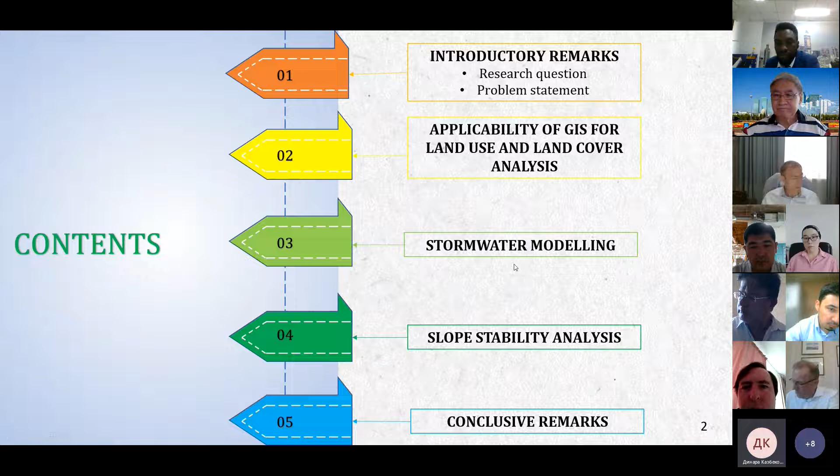So I hope everyone can see the presentation. Yes, yes. Okay, good morning, everyone. My name is Timothy Mkilima, and today I'm excited to present to you key results from the study titled Aspects of Embankment Dam Stability, considering the effect of land use change and climatic conditions in catchments. To start with, here we have the main list of contents from the introductory remarks to the conclusive remarks. And for the introductory remarks, I will start with the research question.

But before I proceed, I would like to highlight that in general, this study was designed after observing what is currently happening in the Msimbazi catchment in Dar es Salaam, Tanzania. Dar es Salaam is actually the largest city in the country. Because this catchment crosses the center of the city, it has been subjected to significant change in terms of land use cover. As a result, the catchment that was flowing throughout the year has now changed into a highly intermittent one. During the rain season, it comes with huge volume, with very high demolishing power, and after that the catchment remains almost dry the rest of the year.

Also note that in December 2011, the catchment received the so-called 100-year event that left almost 50,000 people in the city homeless and killed hundreds of people. Every rainy season, the catchment also kills a number of people and leaves thousands homeless. Because of that, the World Bank has invested a lot of money, as we speak, in search of a solution. However, in my opinion, unless these two factors are well understood, we are still very far from reaching the appropriate solution.

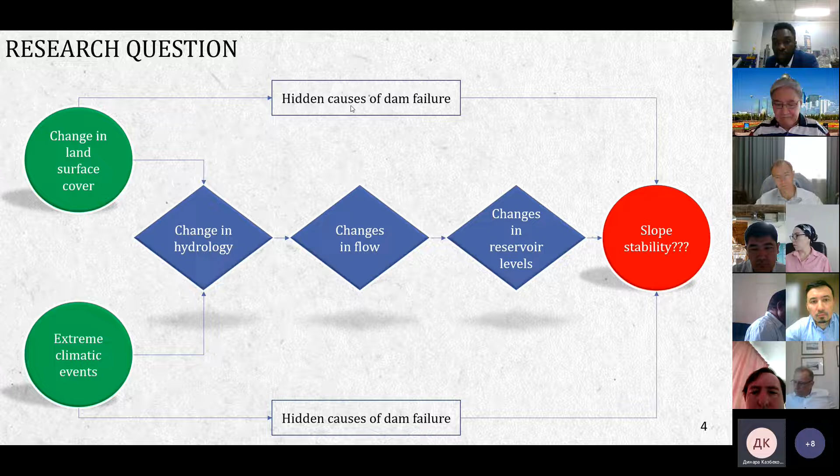Interestingly, the National Geographic from the United States has recently included these two factors among the hidden causes of dam failures that are likely to compromise the safety of dams in the future. So this is the general perspective of the research question.

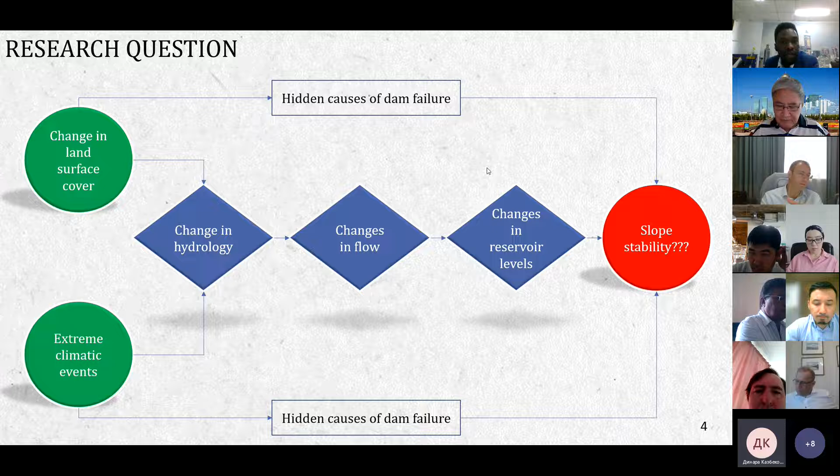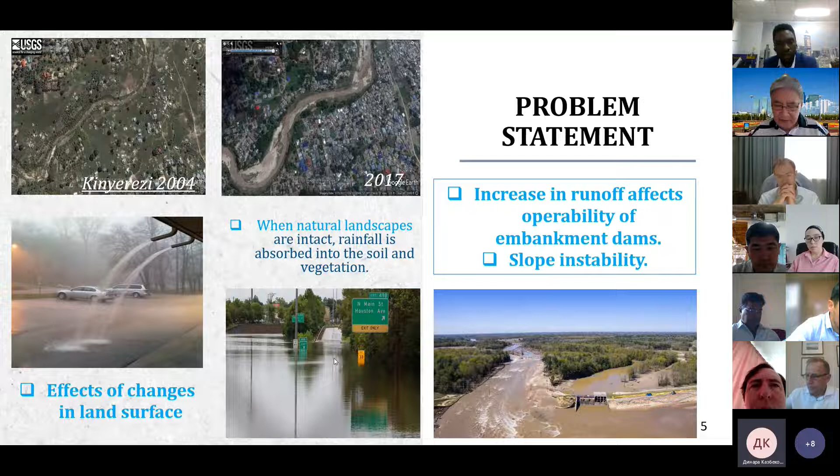When you have something like this, you have more impervious surface cover. And when you have more impervious surface cover, you limit the infiltration to the ground. When you limit infiltration to the ground, you have surface runoff like this one, and eventually you have a dam failure somewhere.

To proceed with the problem statement, here is a nice illustration of pervious and impervious surface cover. When you have more natural surface, you have less surface runoff and more subsurface flow.

And when you have more subsurface flow, it takes a very long time for this water to reach a nearby dam, giving more time for the dam to accommodate the flow.

But when you change the surface into an impervious one, you have more surface runoff that goes faster to a nearby dam, and this does not give the dam time to accommodate the flow.

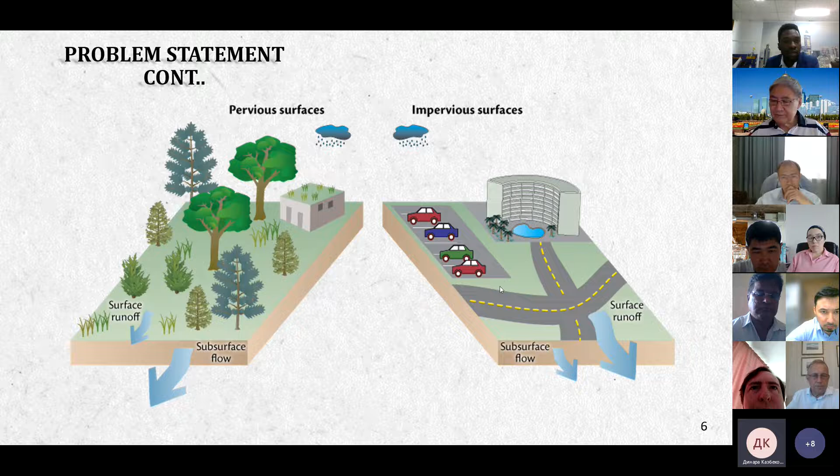Now, because of time, let's also move to the research design. In general, the research was designed based on four main tasks. Number one is GIS applicability.

From this part, it gives us a go-ahead to proceed with the land use land cover analysis. The results from the land use land cover analysis are then used in the stormwater modeling.

And the results from the stormwater modeling give us the decision on whether we include both high water level or reduced water level for slope stability analysis.

The methods used in general include GIS, the SCS curve number method, and finite elements. From the datasets, I use digital elevation models, Landsat satellite images, and soil data.

Here is the hydrologic soil group, precipitation, observed flow data, and soil data as a geotechnical parameter. A total of five case studies were used, two in Tanzania and three in Kazakhstan, with three virtual models.

So let's move to the potential applicability of GIS and land use land cover analysis. From the potential applicability of GIS, here I use the Msimbazi catchment, and the reason is that in the analysis I used the so-called supervised method in ArcGIS.

In this approach, it's very important that you develop a base model from a well-known catchment.

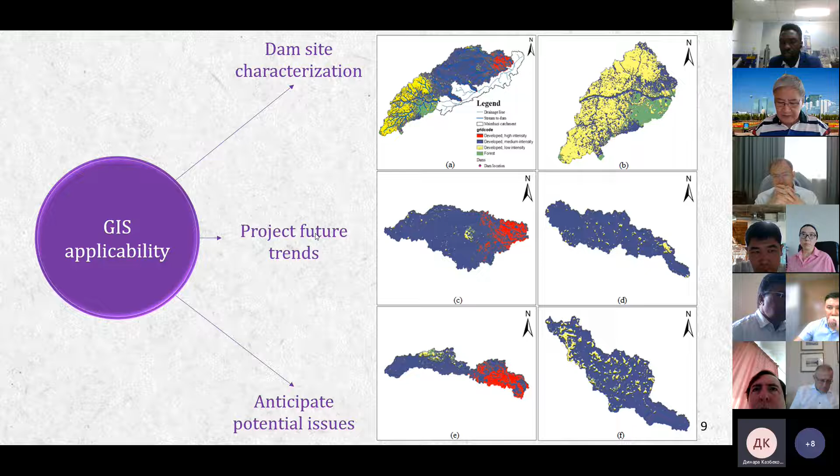With this, you can be able to project future trends and also anticipate potential issues that are likely to be linked to changes in land surface cover.

So to proceed with the land use change analysis from the base model, I was able to proceed with the land use change analysis for the Ndembera catchment. Here we can see from this nice figure how the situation was in 1990 from the 1990 datasets.

The catchment was covered more by wetlands, but by 2011, the catchment was moving more into medium intensity impervious cover.

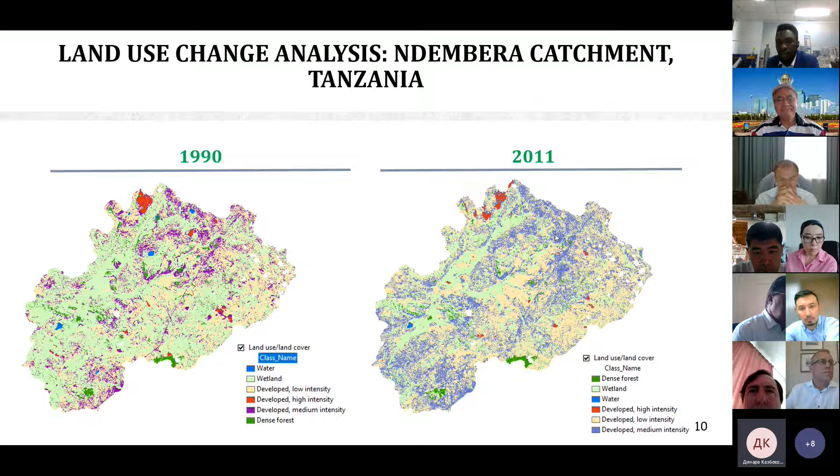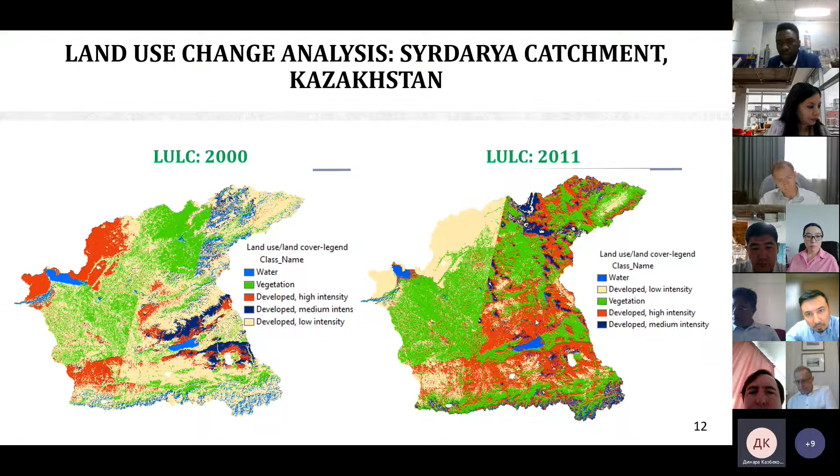Going further to the Syrdarya catchment in Kazakhstan, we can understand that by 2000, the catchment was more of a mix between low intensity and high intensity development. But by 2011, the catchment is moving more into high intensity development. From the graphical view, we can visualize better that by 2000, the catchment was covered with more low intensity, but right now it's moving more into medium and high intensity development.

The results from the land use and cover analysis were then used in the stormwater modeling, especially the curve number. Based on the results I obtained from the land use and cover analysis, I was able to model the stormwater in the catchments.

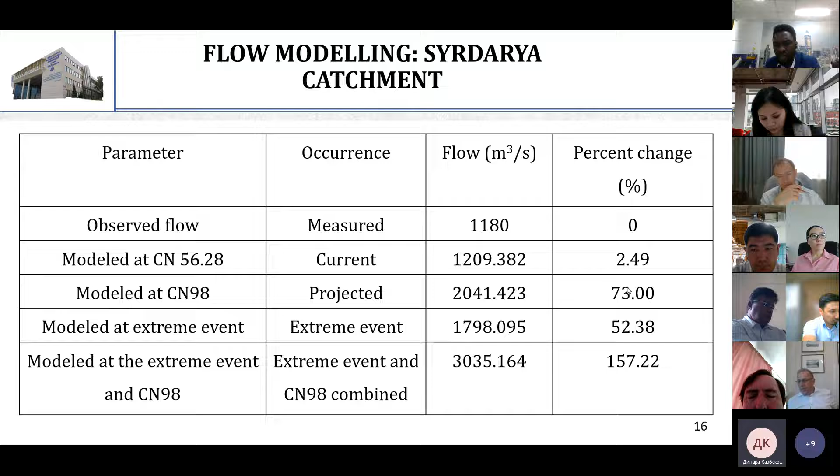Something important to note here is that for the Syrdarya catchment, the curve number had more impact than the extreme event, in comparison to the Ndembera catchment, where the extreme event had more influence on the flow than the curve number. This is realistic because Tanzania is located within the tropical region, and of course precipitation is significant in comparison to Kazakhstan as a region.

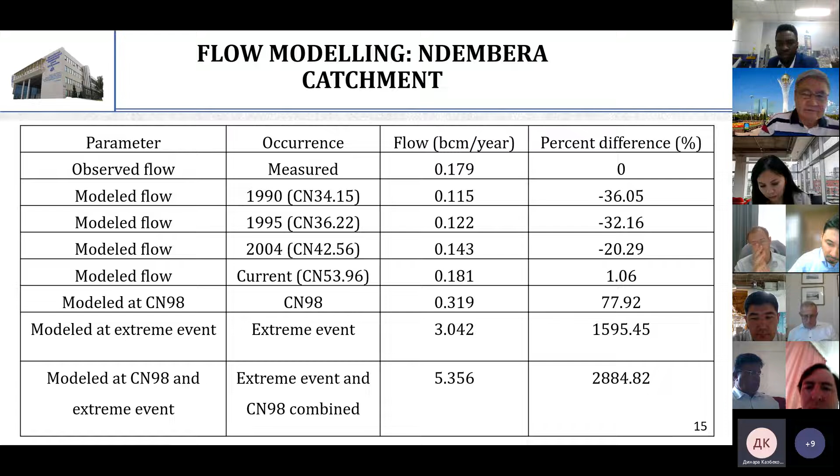So now, after looking at the flow, let's move to the slope stability analysis. In general, the design of slope stability analysis is based on three main factors: when the flow changes in the catchment, we have a change in water level in the reservoir that affects both steady state and transient conditions. Also, when we change the water level or flow in the catchment, we subject the embankment to rapid drawdown, either planned or unplanned. Then we end up with some sort of instability issues, but of course the stability issues are also somehow related to material characteristics that affect the pore pressure dissipation.

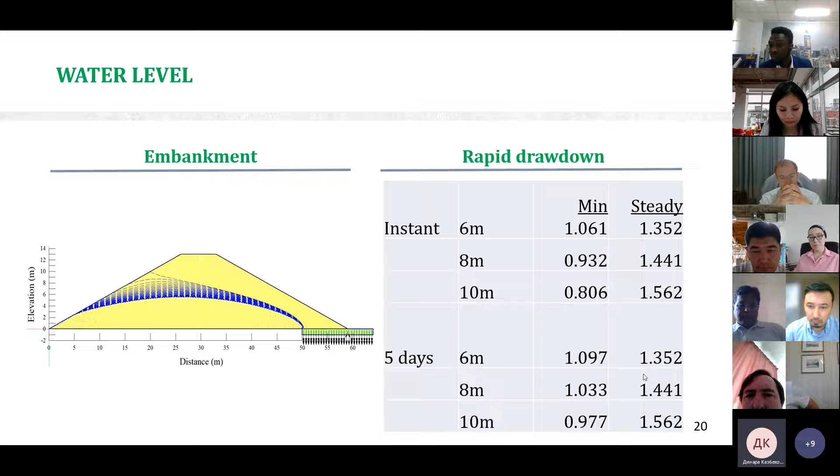Something important to note here, as I observed in the study, and I think this is where we always make mistakes as engineers: if you focus only on the steady state condition, you will find that the factor of safety is increasing with the water level. But indeed, if the same embankment is subjected to rapid drawdown, we have total failure. So it's significantly important to take into account both the rapid drawdown and steady state conditions. Similarly, when subjected to 5 days, the same situation occurs: as you increase the water level, the factor of safety values decrease, while the steady state factor of safety values increase.

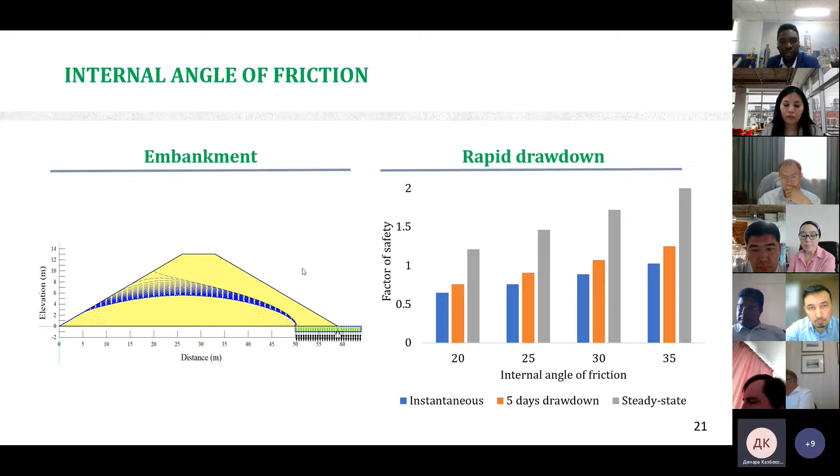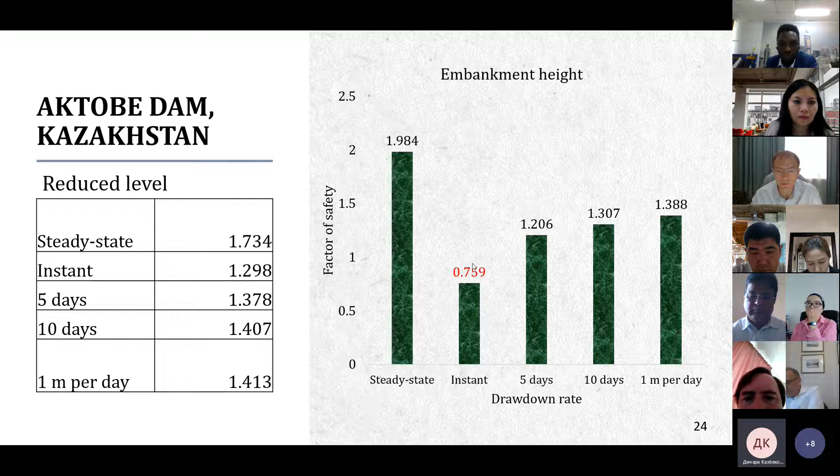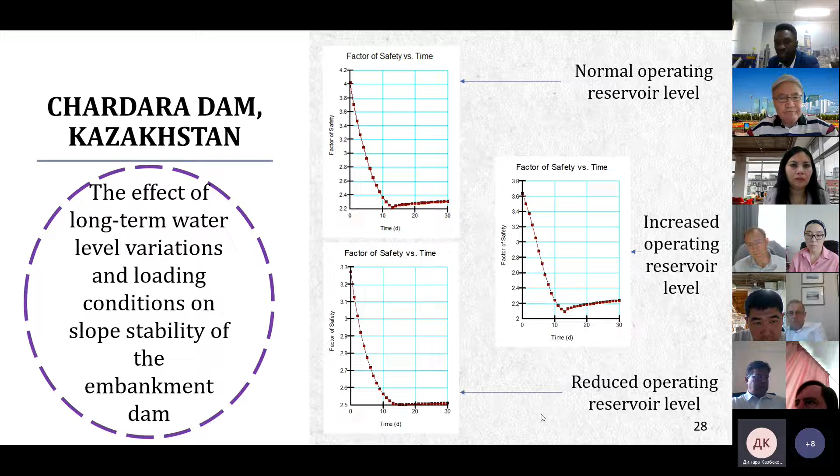This is a graphical presentation of the results from the Chardara Dam in Kazakhstan, for a 1 meter per day drawdown rate. From the normal operating reservoir level, we get a minimum value above 2.2. If you increase the water level in the reservoir, you get something below 2.2. But if you reduce the reservoir level, you get something above 2.5.

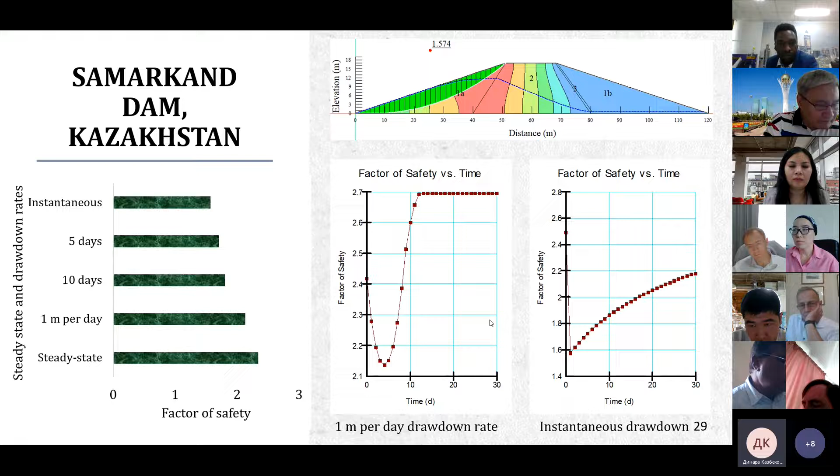So it was also significantly important in the study to justify the results based on some methodologies, especially statistical methods. And in my case, I used a very useful tool, the so-called ANOVA, analysis of variance, to justify the significance level of the differences in terms of the factor of safety values.

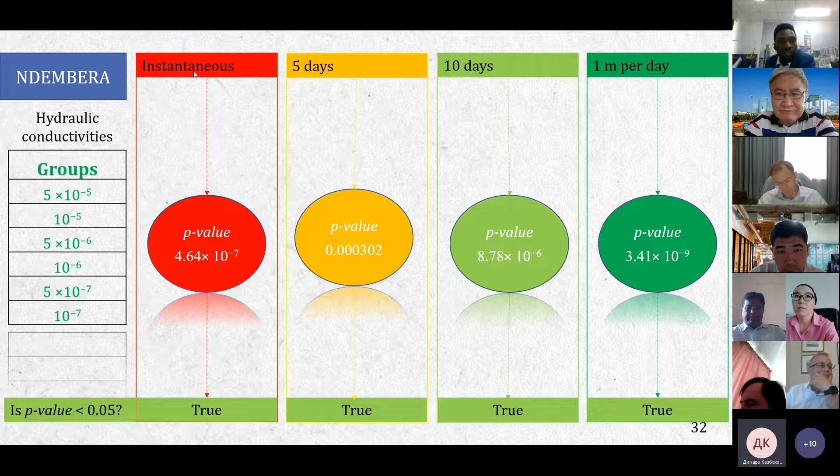And if we move to the Ndembera Dam, different hydraulic conductivities were also subjected to the ANOVA. For the combination of these hydraulic conductivities and instantaneous drawdown, the p-value is less than 0.05. This is also an indication that the differences were statistically significant, and these factors should not be ignored when it comes to the design of dams, similarly for the other drawdown rates.

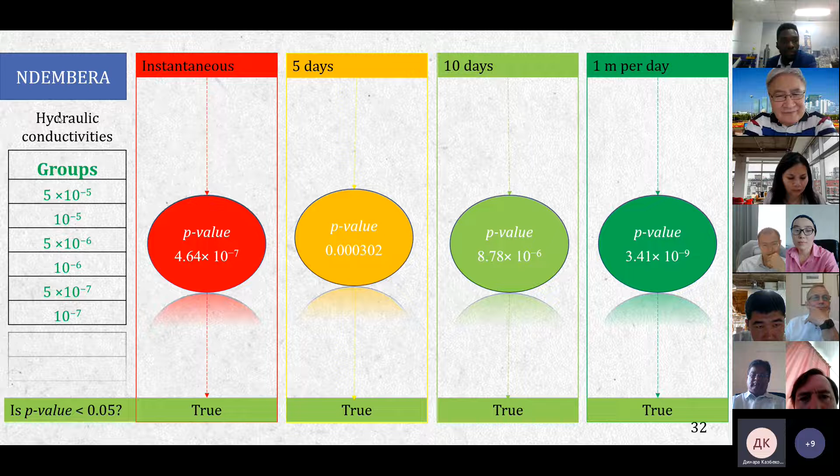Here there are two things we can note: at least when we reduce the drawdown rate, we also reduce the impact of water level in terms of slope stability. However, this should be taken with care, because the p-value is still below 1, which means there are still some differences in terms of the factor of safety values, and these should also be taken into account during the design.

And moving to the conclusive remarks, from the GIS application, using the supervised method, I was able to sufficiently delineate the dam site. And this part should also be very well incorporated during the design. And from the land surface cover analysis, as we observed from the Ndembera Dam, the medium intensity moved from 13% cover in 1990 to 54%.

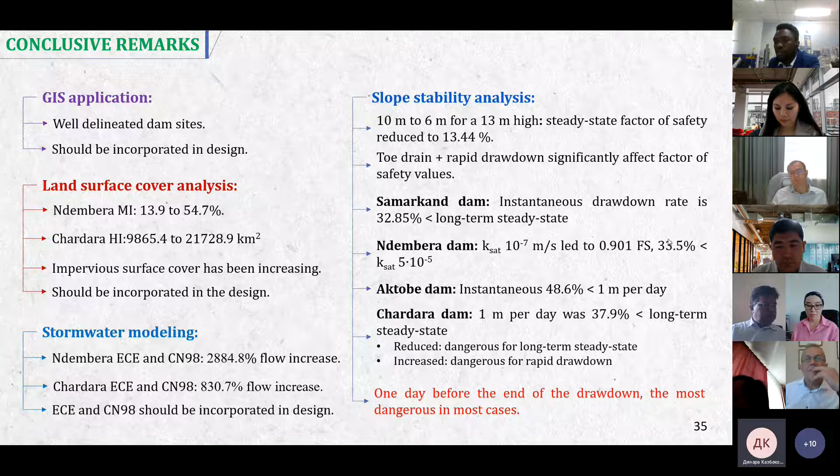Also from the Samarkand Dam, the instantaneous drawdown rate led to a factor of safety value that was 32% less than the one obtained from the long-term steady state. And from the Ndembera Dam, for the hydraulic conductivity values, 10⁻⁷ led to a factor of safety value of 0.901, which is 33.5% less than the one obtained from 5 × 10⁻⁵.

Also from the Aktobe Dam, the instantaneous drawdown rate led to something 48.6% less than the one obtained from 1 meter per day. Also from the Chardara Dam, 1 meter per day drawdown rate was 37.9% less than the one obtained from the long-term steady state.

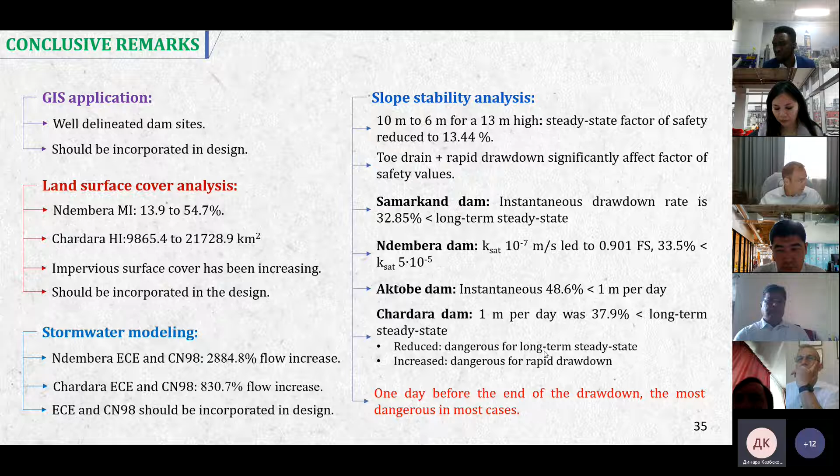Now, what I observed in this study is that when you reduce the water level in the reservoir, this becomes extremely dangerous for long-term steady state condition. But when you increase, this becomes extremely dangerous for rapid drawdown. Therefore, when you design a dam, you do something optimum, taking both into account, so that you can take both into account during the design.

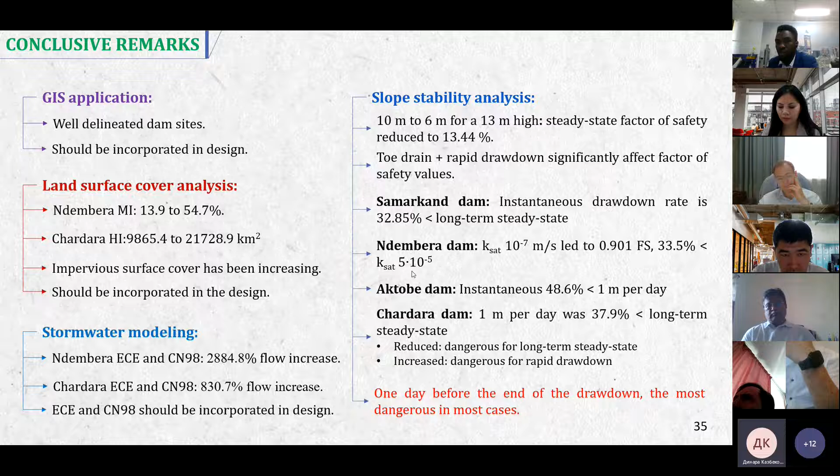And here I also had to highlight in red that from my study, I also observed that when you subject your embankment to rapid drawdown, then 1 day before you finish the drawdown becomes the most dangerous day in most of the cases. Therefore, when you drain your reservoir, you have to carefully pay attention on the last day, 1 day before you finish your planned drawdown. Of course, if you are able to plan, because sometimes the rapid drawdown can be unplanned and natural.

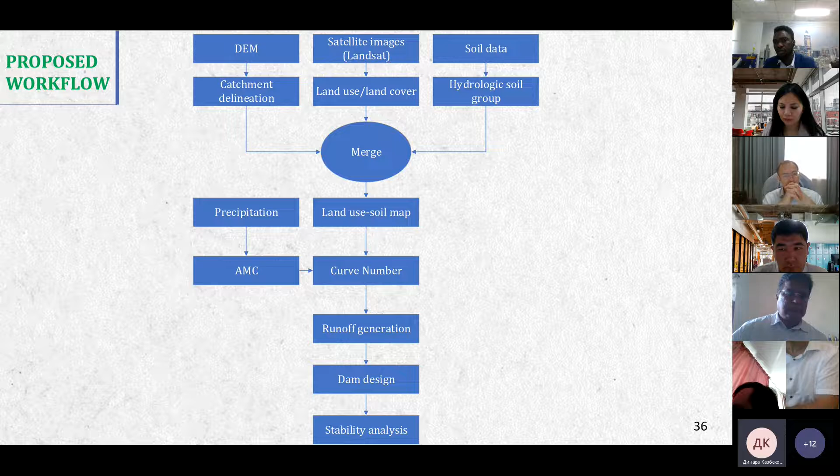And also, based on the results, I was able to propose a workflow for embankment dam analysis. And the workflow is like this. If you combine digital elevation models, Landsat images, and soil data, you merge all this data, you come up with a land use soil map, and you combine with precipitation data, you come up with curve number, you generate runoff, you design your dam, and then you subject your dam to stability analysis. In this way, the design team can take also these two factors into account.

And recommendations for some future works. Normally, when it comes to dams, we have the International Commission on Large Dams. It is very unfortunate that this commission does not include land surface cover as one of the significant issues to be observed. And also in 2020, I got a chance to review all the documents that were used in the design of Ndembera Dam in Tanzania. It was also very unfortunate that none of the documents speaks about land surface cover change.

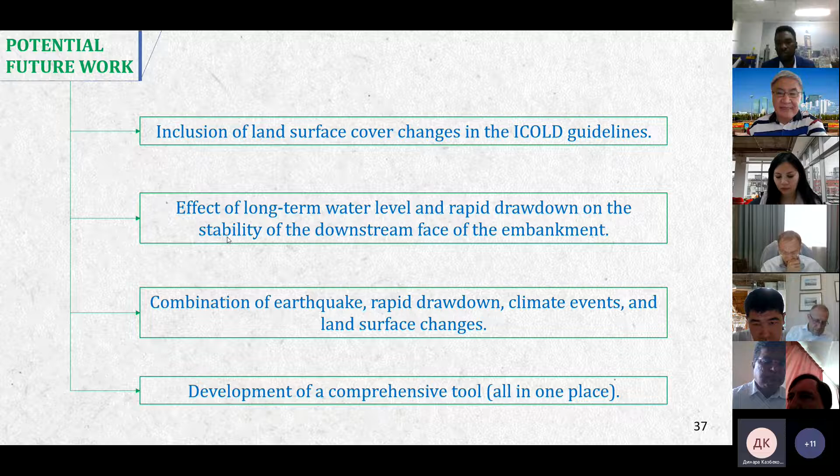And also, you may notice that in my study, I focused on the upstream zone, but in the future, other studies could also focus on the downstream face of the embankment. And also the combination of all these parameters together, like earthquake, rapid drawdown, climatic events, and land surface cover, and then investigate. And also, if possible, develop a single comprehensive tool that would take all these factors into account for the stability analysis of dams.

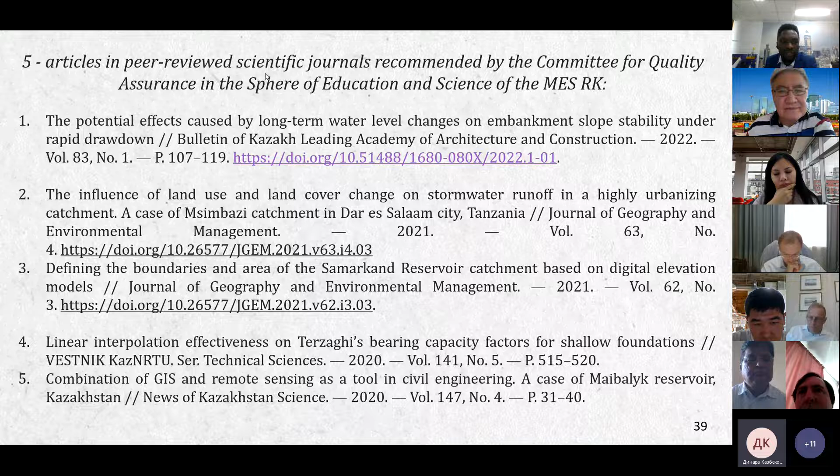And here we can look at the publications: 5 articles in the journals recommended by the Ministry of Education in Kazakhstan, 3 articles in international conferences, and also 3 articles in international peer-reviewed journals. And that's the end of my presentation. Thank you very much. If there are any questions.

Thank you very much, Timothy, for your informative presentation. So please, questions, if you have, from members of the dissertation council. Questions can be oral or written. So please. So please, Dr. Kotov.

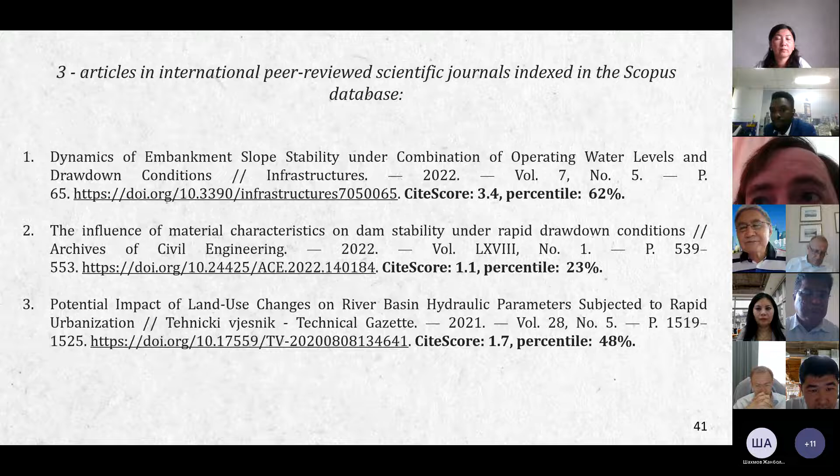Okay, thank you for the presentation, and I have 2 questions. First, there are different types of slope stability calculation. Could you tell more detail about your model, and especially what kind of soil characteristics did you use in calculation? This is the first question. You said there are 2 types of slope stability analysis? Yes, there are different types of slope stability calculations. What kind of model did you use in your work, and what kind of characteristics, especially soil characteristics? Okay. Thank you very much for such a nice question.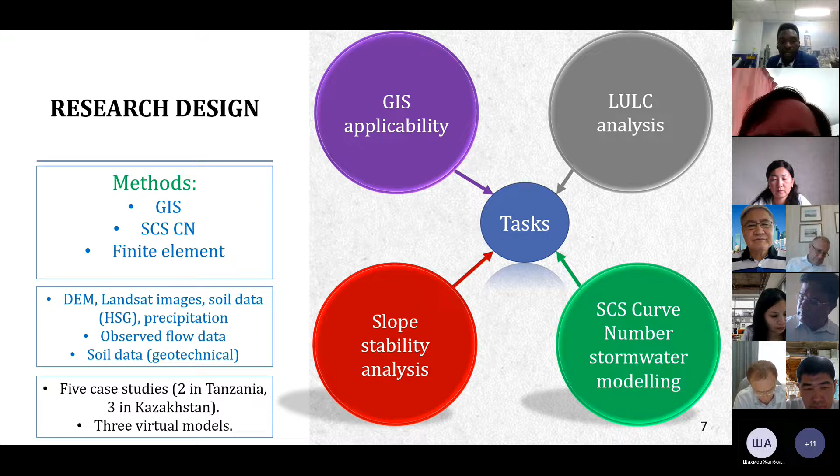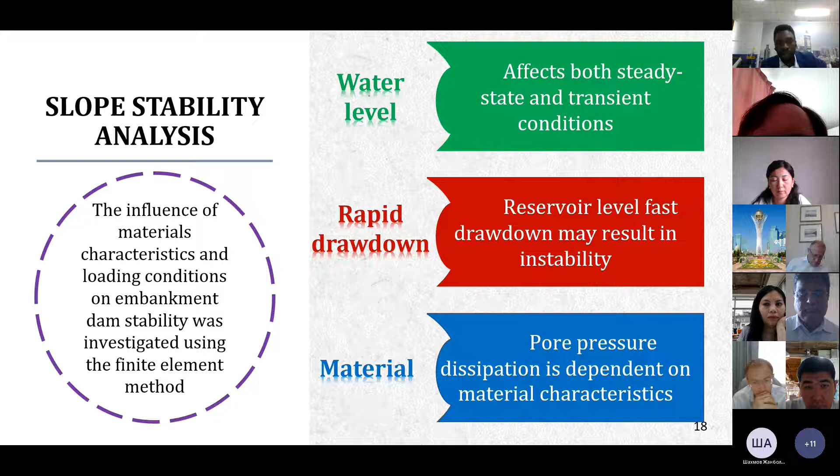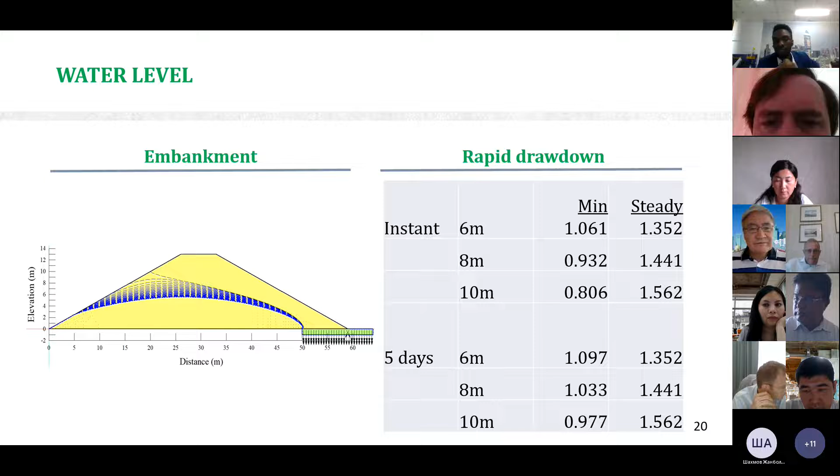In my case, as I highlighted in the research design, I used the finite element method in the analysis, and also the Morgenstern-Price method in GeoStudio. So this is the first part. And in terms of soil parameters, there were different soil parameters depending on the case study. Like you can see from this one, I fixed all the parameters like the cohesion and internal angle of friction, but these parameters were taken from the ICOLD guidelines for the homogeneous ones.

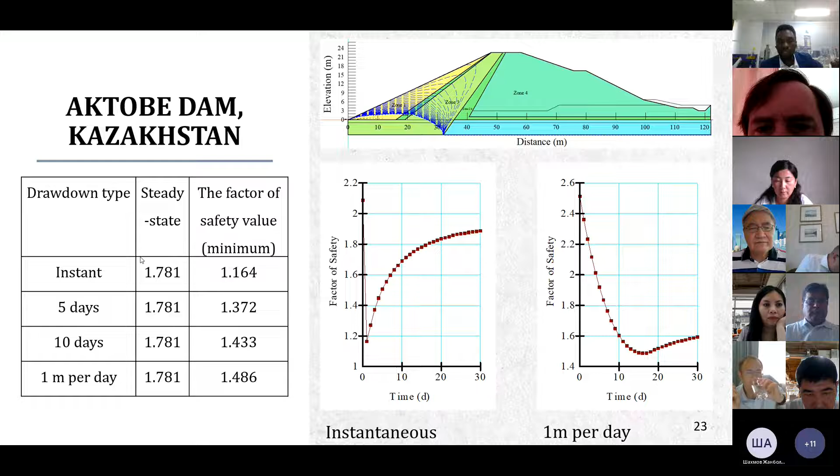But for case studies, we used some real parameters from the design, but only for the Ndembera Dam, where I had to subject the embankment to different permeabilities, as you can see, from 5 times 10 power minus 5 to 10 power minus 7. And for other dams, I used the specific parameters from the design.

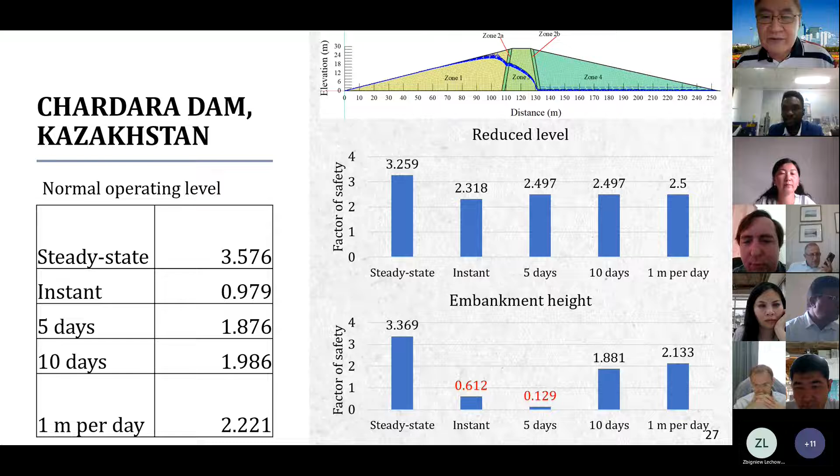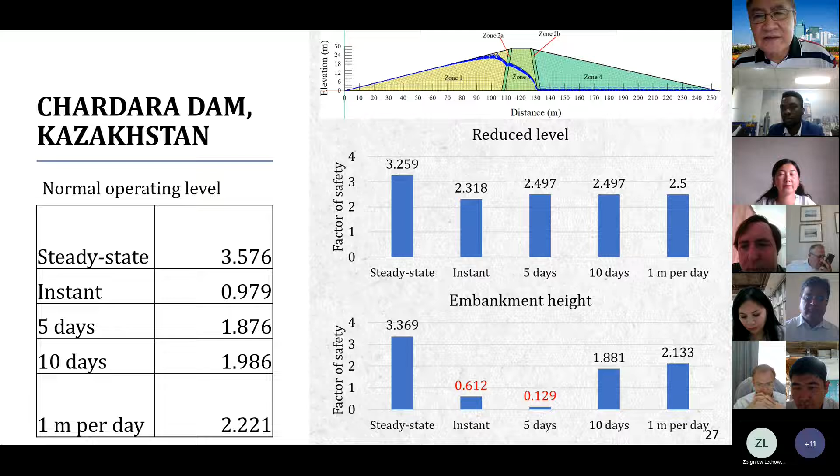So, Timothy, also Pavel, during the time of giving questions, Dr. Pavel Kotov also asked what model of soil you used during your calculation. What is the model for finite element analysis? What soil ground model do you use? Maybe I have not understood. When you say Coulomb, Tresca, Prager, what is the soil ground model you use? Linear or nonlinear?

You know, when we use the finite element method, in this case, the other models, like linear, plasticity, these kinds of things, are somehow ignored, because I use the finite element method plus Mohr-Coulomb, especially for slope stability. In this case, we don't have a mechanism to include the other types of models. So only one type of model, right? Yes. And it was important for me to keep everything constant, so that I only capture the effect of the parameters of interest I wanted to investigate.

Okay, thanks. Next questions. I have one question. Thank you for your presentation. My question is, on the basis of the findings of your research, what is the message you would like to convey to the field of embankment dams? Okay, thank you very much for such a nice question.

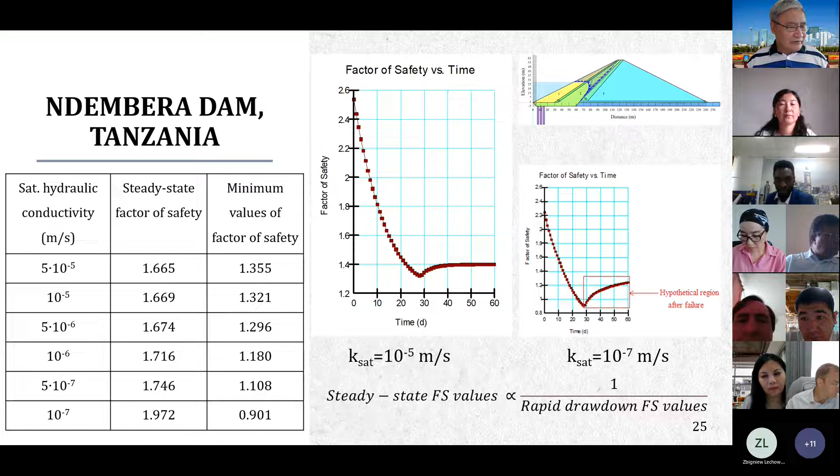So now, if no questions, the word is given to the scientific advisor, PhD, associate professor, acting professor of the Department of Civil Engineering of Eurasian National University, Dr. Utepov Yelbek Bahitovich. Please. Thank you, Professor Spekov. I would like to share my screen with my review for the thesis of Timothy. I will just read it shortly.

Regarding the urgency of this topic, in the field of dams, stability remains a crucial requirement all over the world. Therefore, protection, retention, and permanent evaluation of the dam stability are essential. Timothy has been able to publish more than 3 papers in local journals, 3 papers in international journals with high impact factor and percentile in Scopus. The highlighted potential effect from the combination of water level and rapid drawdown conditions provides highly useful information in embankment dam design for highly sustainable dams.

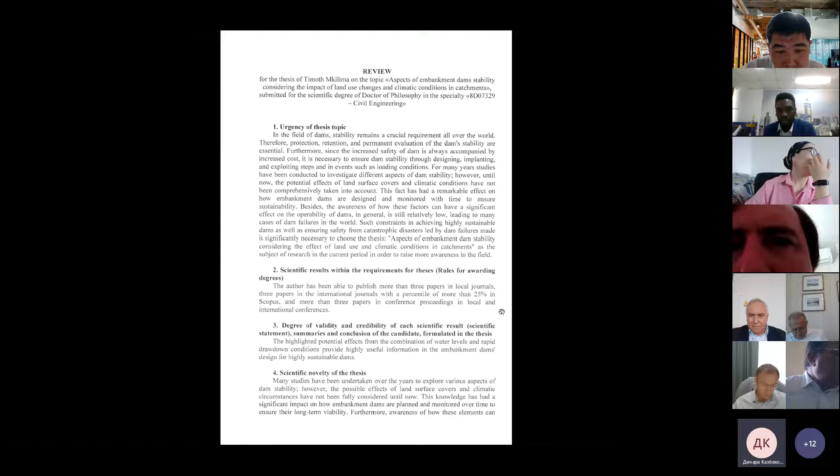The results derived in this study showcase the significance of incorporating factors such as land use change and climate conditions in the design of embankment dams. After carefully reviewing the thesis report, I can undoubtedly state that the author has done an outstanding job and that the thesis is ready for this. The thesis is really nicely written.

The thesis of Timothy meets all the requirements for degrees, and I would like to mention that he really did a great job during his studies, during writing this thesis. We had many meetings with Professor Zbigniew, his international supervisor also, and I think based on the aforementioned, Timothy deserves the PhD degree. Thank you.

Thank you, Dr. Utepov. So if no questions from members of the dissertation council, no questions for Dr. Utepov? No. So if no questions, the word is given to the foreign scientific advisor, Doctor of Technical Science, Professor of the Department of Geotechnical Engineering at the Warsaw University of Life Sciences, and Vice President of the Polish Geotechnical Society, Dr. Zbigniew Lechowicz.